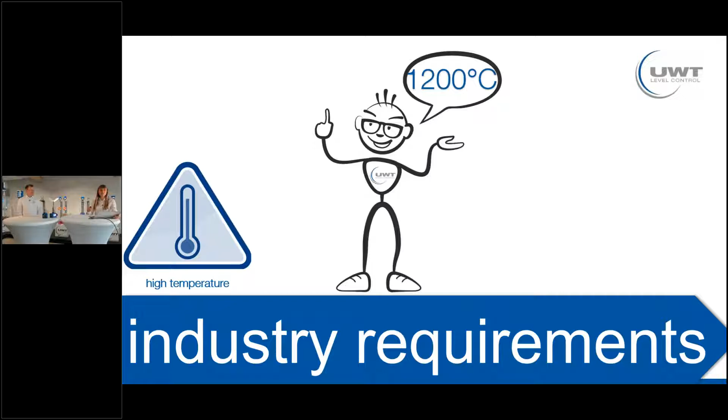We have specialized solutions for aggressive material. You can have our sensors made of special alloy steel with FFKM sealings, or for example we can coat your sensor completely with PTFE.

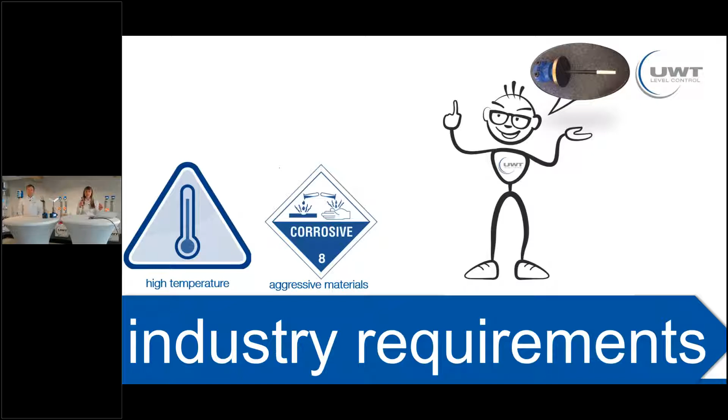The next point is the issue of mechanical load. Every sensor range includes a heavy-duty version. We can offer you sensors for mechanical loads up to 1200 Newton meters. Alternatively, you can use our NivoRadar.

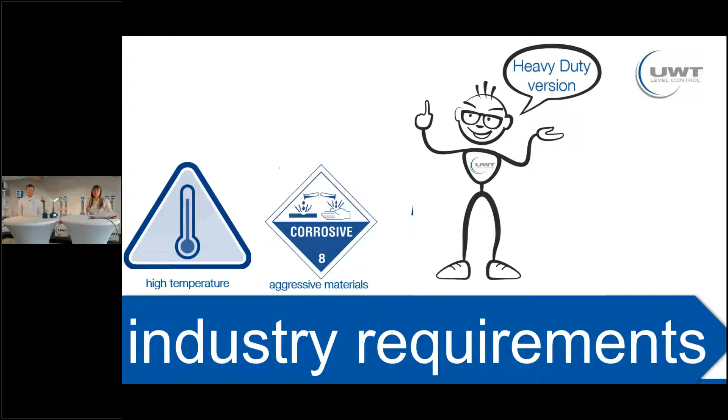A wide range of extremely dusty materials are used and found in the metallurgy process. To meet this challenge, your sensor comes equipped with a high degree of protection by way of the housing design, up to IP68, for example in the NivoBob. And on the processing side of the sensor, we also ensure full protection against dust.

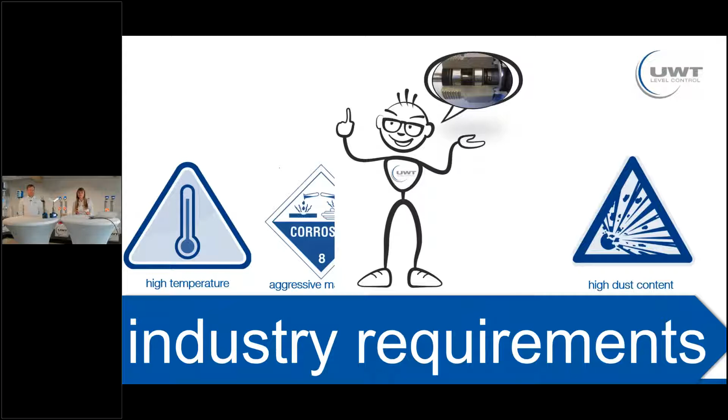Naturally, no one wants to be constantly replacing the sensor in a processing plant, so our sensors offer complete reliability and durability. In fact, one of our longest running devices, a RotoNivo, has been in constant use since 1982, which I think makes it older than many of the participants in our training session.

Yeah, it's even older than me. So, old guy.

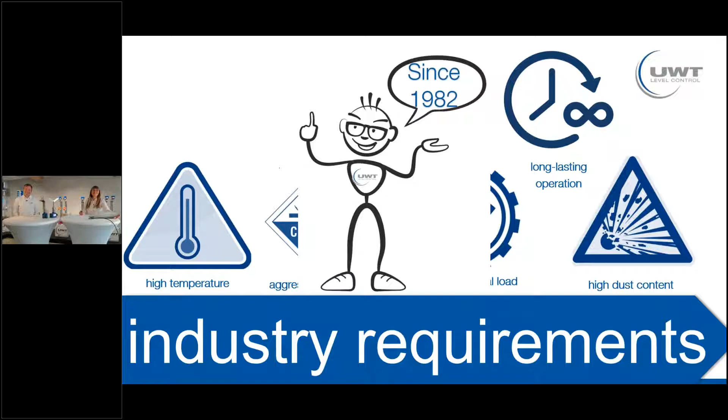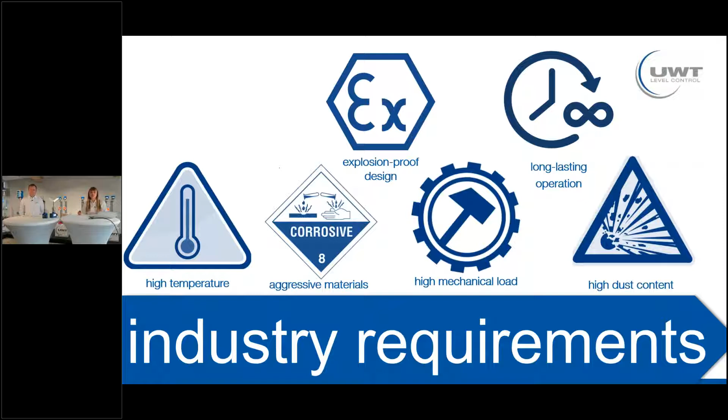Equipment in metallurgy plants must of course be explosion-proof. Our equipment is certified in countries all over the world. In addition to explosion protection, we can offer you sensors which meet the SIL requirements.

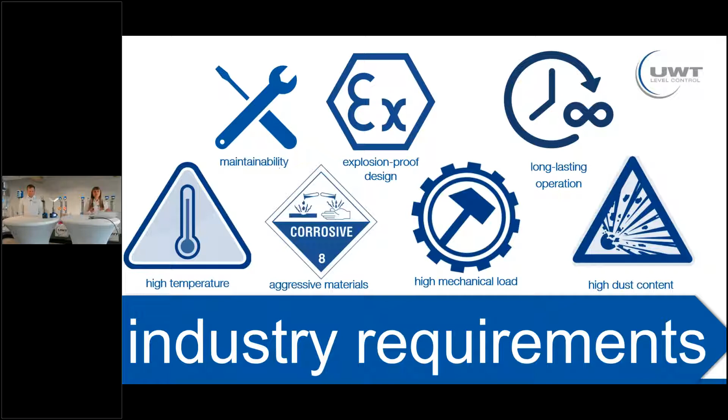And of course, in the unlikely event of something going wrong, we can support you by offering a wide range of spare parts for all our products, so you can simply and easily repair the device yourself. We support this with easy to understand self-help videos on our website that take you through all repairing processes step by step.

Thank you, Alexandra, for the industry requirements. So there are many challenges our sensors, our measurement devices are confronted with. But now let's move on to the process steps, raw material extraction, and then how steel is made, and also have a look at the success stories, what we already solved in the metal industry.

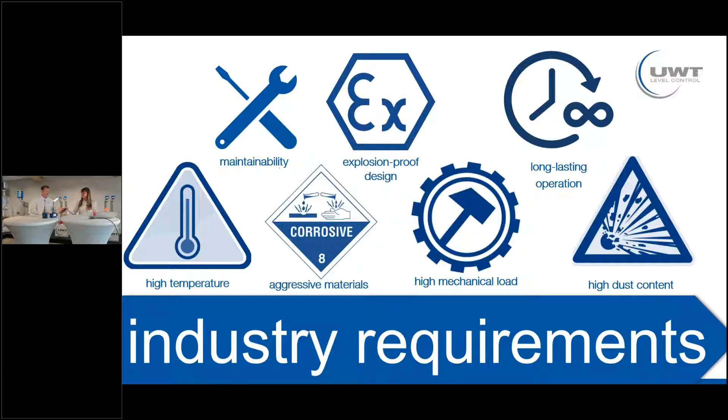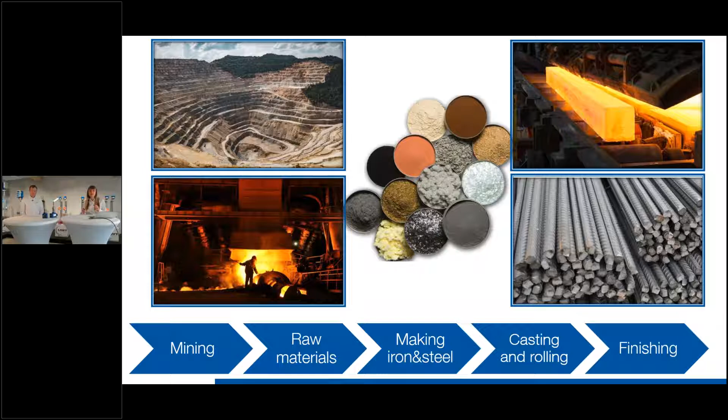From the rock to metal, there are the following steps: mining, raw material handling, casting and rolling, and finishing. Let's now look at our success stories for each step.

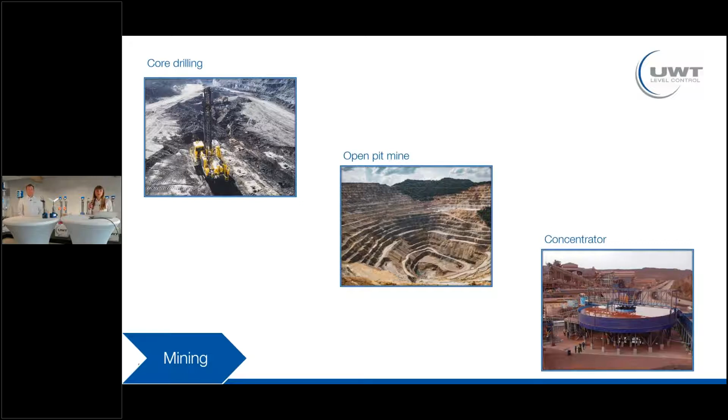To mine metallurgical coal, which will later be turned into coke, it's usually necessary to sink vertical mine shafts to access coal, which is deposited in layers or seams underground.

What complex tasks have we solved with our sensors? Let's see.

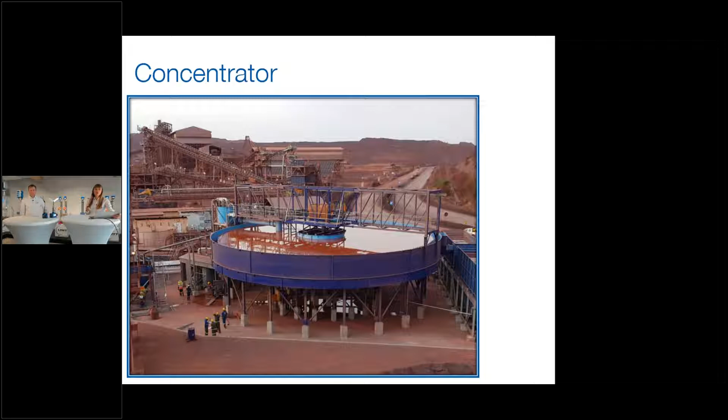Mining with stowing is an environmentally friendly way for coal mining. Stowing materials could be sorted as chemical reaction materials, solid refuses from coal mine, and natural material for stowing.

The customer had to know the level of stowing material in an exhausted mine. We had to use the available ventilation pipe for the measurements. The measurement range was only 30 meters, but it was completely underground at a depth of 100 meters.

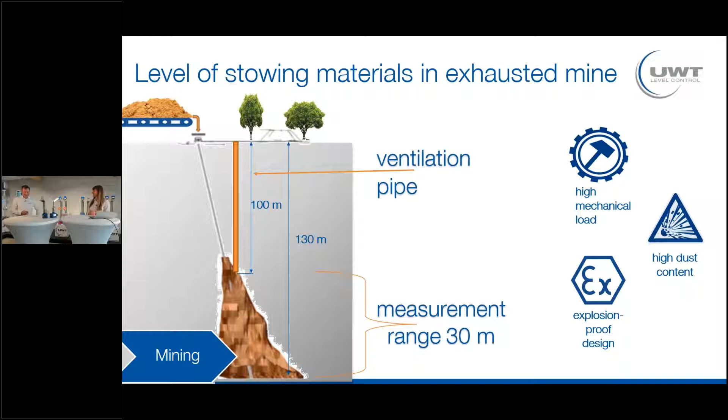How did we solve this problem, Nicholas? Yeah, thank you for the description, Alexandra. So this was a pretty interesting application you pointed out.

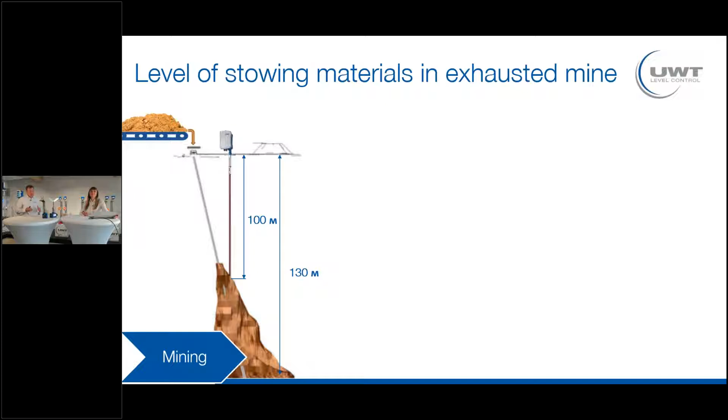So we had to design a special version of our NivoBob 3200. What did we do? We exchanged the standard sensor weight and put it on a longer rope.

The rope had a length of 100 meters, which was necessary to come through the ventilation pipe. With the long rope, we were able to come through the pipe and start the measurement at a depth of 100 meters underground, although the sensor was mounted over ground, as you can see on this slide. At a depth of 100 meters, the measurement range was 30 meters.

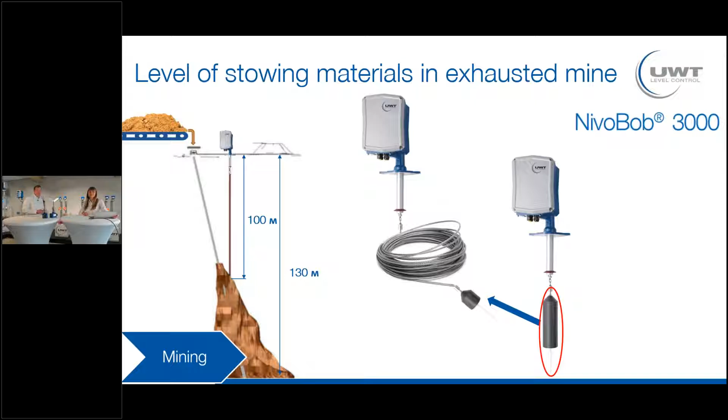This is no problem for our NivoBob 3200 with the S-tape version. Here you can see the mounting position on the right side of this ventilation pipe.

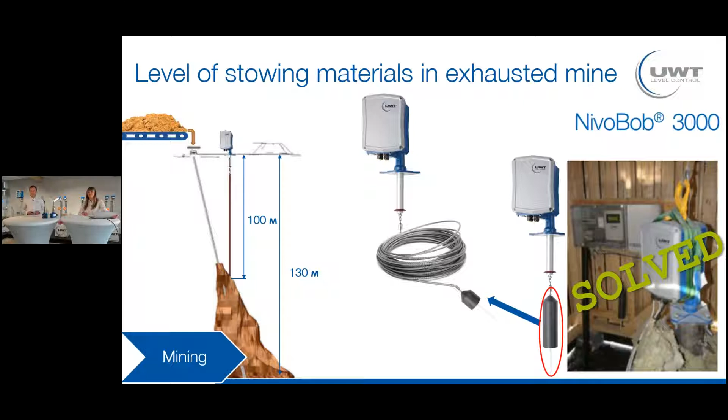Another important feature was the brushless motor for this application. As you know, we have two different motor versions: the standard motor and the brushless motor. The brushless motor has several advantages. The first one is measurement speed, so the sensor weight is driven up and down faster.

Second, and most important for this application, was the stronger motor. We had a greater tractive force, increased from 800 Newton to 3000 Newton. This is important, for example, when the sensor weight gets covered with material and the motor is then able to pull out the sensor weight from this coverage.

And as you know, when you're underground, you don't want to have a covered sensor weight. The lifetime of the brushless motor is way higher than the standard motor, so we have a lifetime of up to 60,000 hours. So we can guarantee that the NivoBob will work for a long time in this application.

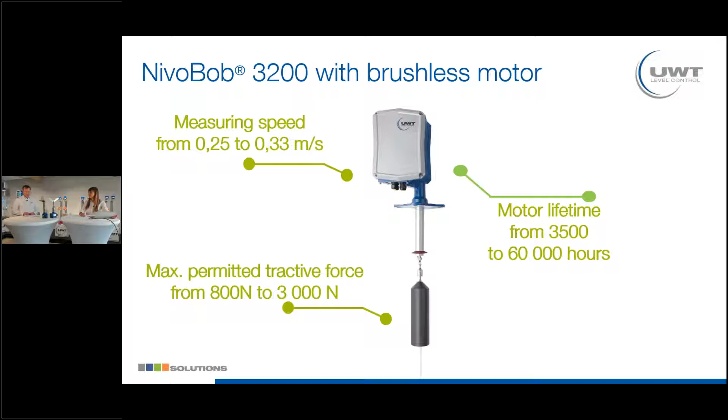A nice and interesting application, solved with a special solution of the NivoBob. We can offer a special solution every time.

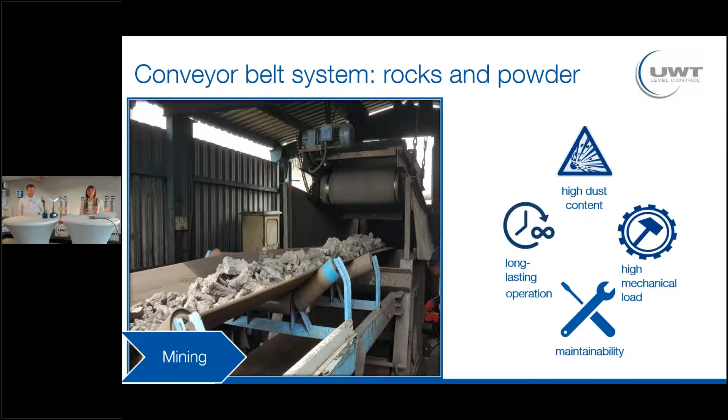The extracted minerals need to be transported for processing. For this transportation, a conveyor belt is used. One of our customers in Costa Rica needed to control a conveyor belt system responsible for transporting rocks and powder into a hopper. The abrasion and dusty environment were a tough challenge, together with the constant high flow speed of the material, which required a reliable response.

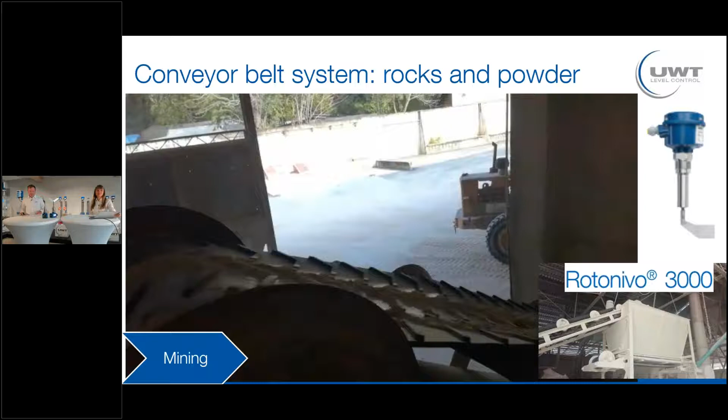Which sensor can be used for this application, Nicholas? You already see it in the video. So we use the Rotonivo 3000 for this application, and I have it here in my hands.

Here with the extension tube around the shaft, as additional protection for the shaft, so there are no damages due to this heavy material. We also have a special sealing design made out of PTFE, to avoid any dirt coming inside the extension or around the shaft.

Robust design, long lifetime in those applications. And for this application, one specialty, what you saw in the video, is that the sensor was mounted at the bottom, but it worked as a full detector.

As soon as the material reaches our sensor, our vane, it's blocked, and then you get a signal. This signal indicates that the cone of the filling material has reached a critical height, and this then stops the conveyor belt and the transportation of new material. So we can protect the conveyor belt from any damages due to too high a material cone.

So mounted on the bottom, but it worked as a full detector. Pretty interesting application here.

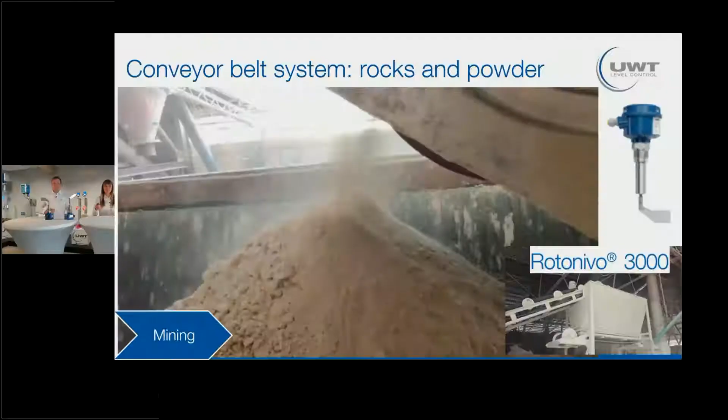Thank you. Let's go on later. Just a moment.

Again, the video you saw here: mounted on the bottom, but working as a full detector. Exactly.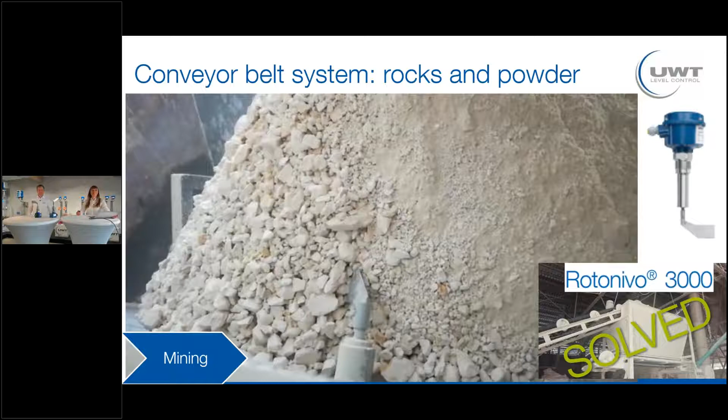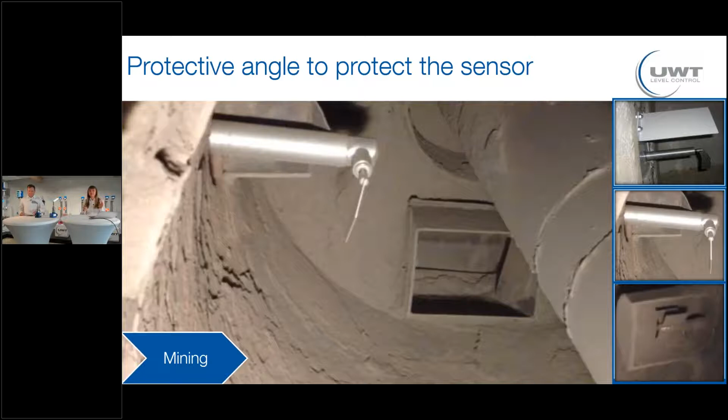Sometimes it is necessary to install the probe at such an angle so as to protect it from the filling material. Here you can see three examples of such protection, different between the sensors of our RotoNivo line.

Yes, we do offer different RotoNivos, as you can see on this slide. There's the standard version 3001, with just the shaft and no additional tube around it to protect it. Then we have the 3003 version, with increased stability due to the extension tube around the shaft.

And then we also have the tension version, what I have here in my hands. This is also a pretty heavy product, and you can see this tension version here. This is for greater stability for pretty heavy materials, to protect the shaft, and it's still working the rotary paddle rotation.

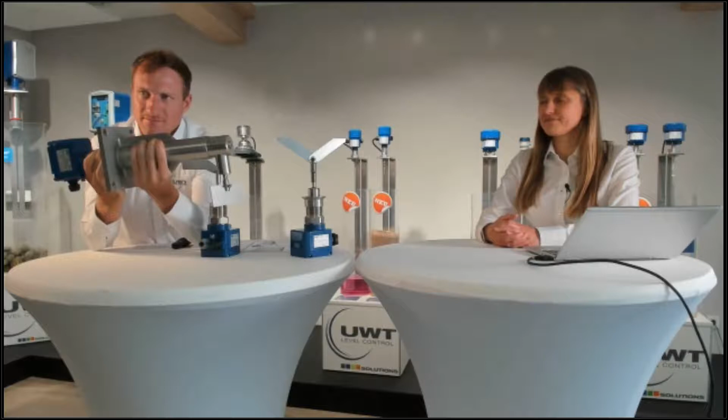And we have a stability of 1,200 Newton meters, so quite a lot of force that can work on the sensor. Also when you lift it, it's pretty heavy, and you can feel the robustness of our sensor here.

So when it comes to heavy materials, the RotoNivo can also be a solution, due to our wide variety, wide product portfolio, with many different versions here. Thank you.

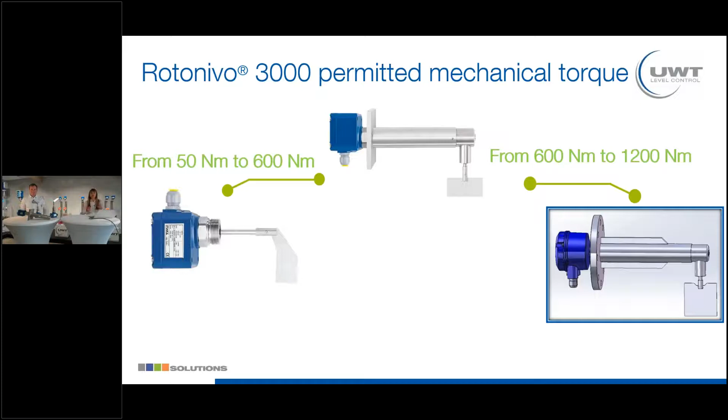Often it is not enough just to detect the filling, but it is necessary to know how much material is inside of the container. Here you can see our NivoBob and NivoGuide in high narrow silos containing raw material and iron ore.

This was, now you can see the slide what Alexandra already described. So we had a few problems here, but the 2-level transmitter you can use for silos with coal, limestone, or iron ore. One is the NivoBob.

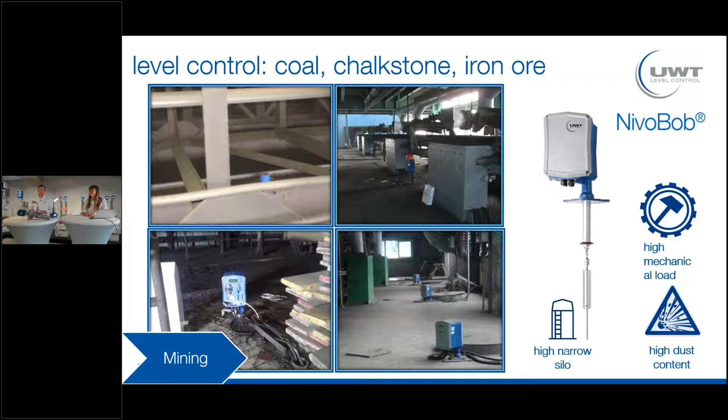Here we can focus on the high dust content. We have a great feature here, called the tape cleaner for our NivoBob 3200 tape version, to get rid of any dirt and dust.

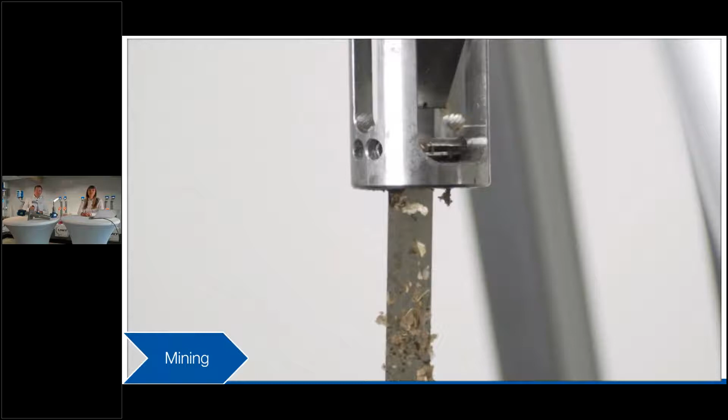So here you can see a short animation and then also a video of how the tape cleaner works and how it cleans the tape. You can see the dirty tape, and when the tape is carried in, all the dirt gets removed from the tape due to the tape cleaner.

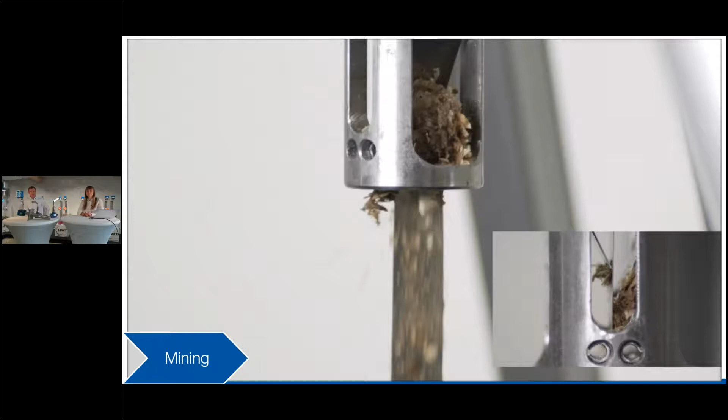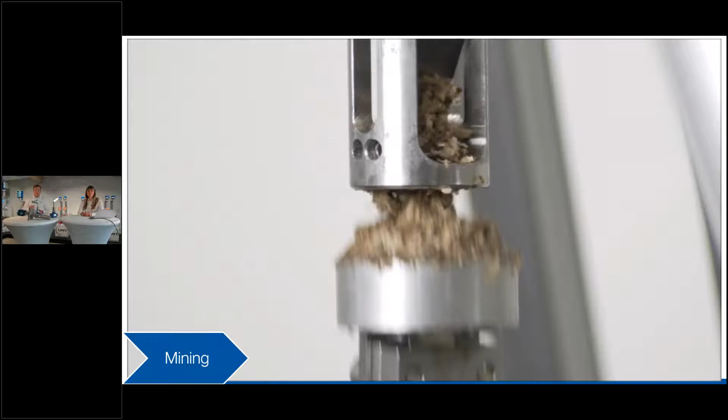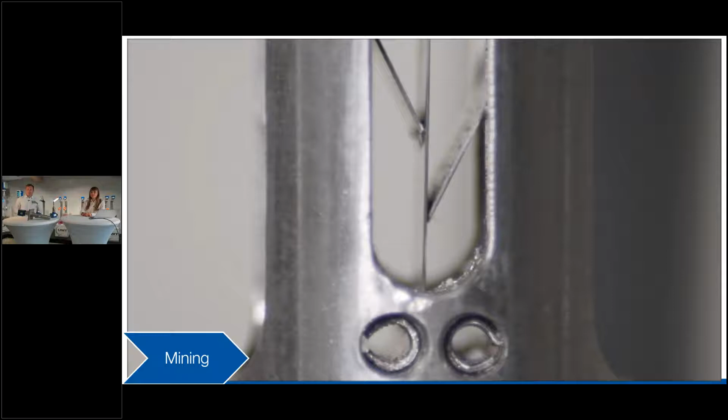It's also a nice feature that our tube cleaner drives in and out of the socket pipe, so you have a self-cleaning effect due to this in-and-out drive. The dirt gets thrown away and nothing is inside the mechanical chamber, so it always stays clean. Here again, the best solution for dusty environments with the tube cleaner.

And what we also have is the NivoGuide, a second technology. Guided wave radar technology can also be used in those silos for solid applications. I have it in my hands here. Again, a robust design of the coupling.

We have a large diameter of the rod or the rope. It's also available as a rope version up to a length of 75 meters, and this rope is also very stable, with a diameter of 6 millimeters. So, pretty robust design and a perfect sensor for those applications.

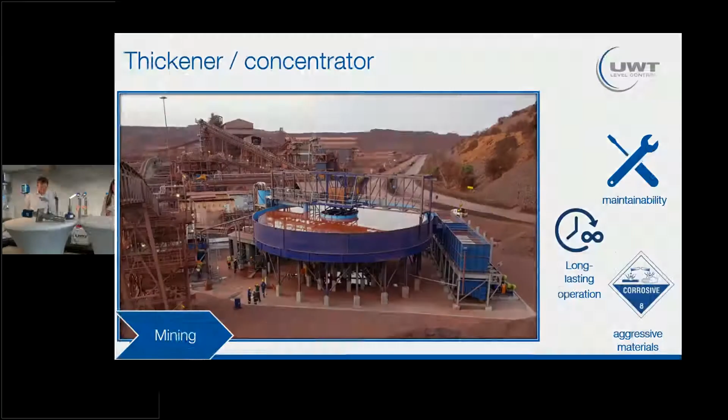Thank you. The next application is a thickener or concentrator. Here it is necessary to measure the interface of sludge in the water, with frequently changing parameters of the measured material.

The product is a slurry of water with tailings. It is like sand, 80 microns. This medium is very aggressive with a lot of different acids. How can we protect our sensors against aggressive materials, Nikos?

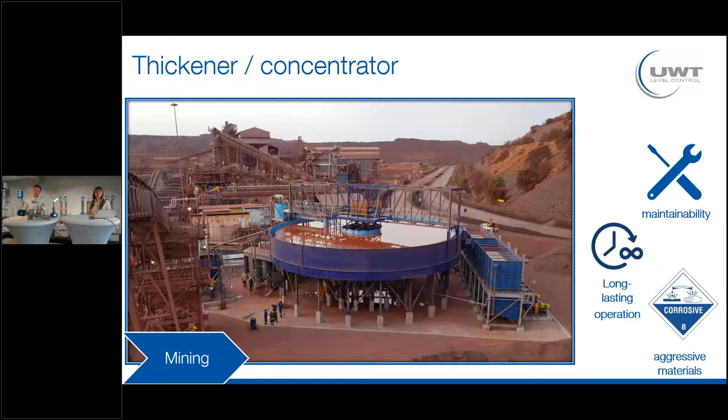Yeah, again, quite a challenging application. Here we had to design a special solution again for the NivoBob with coating. So what we did, we coated the sensor wire with Halar, and we also had to design a special sensor wire. Here on the picture in the middle, you can see the Halar coating for the aggressive material.

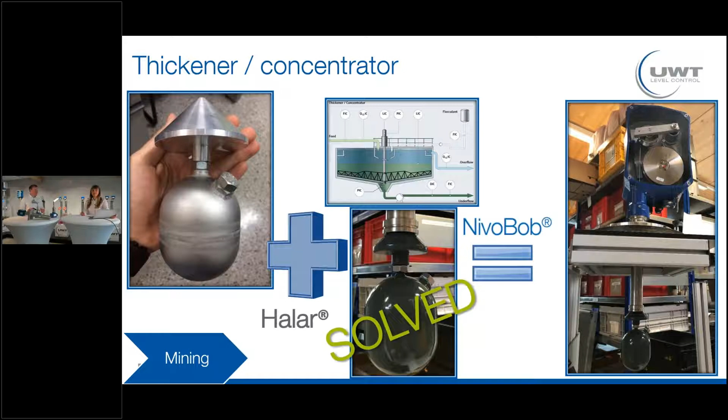So with this coating, it's quite resistant against this aggressive material. We also implemented a stainless steel tape roller to make it more robust and more resistant against the aggressive environment in this application. So here again, a special solution for a challenging application.

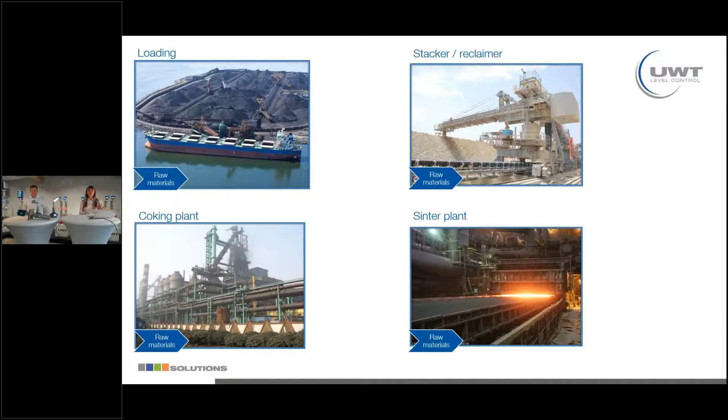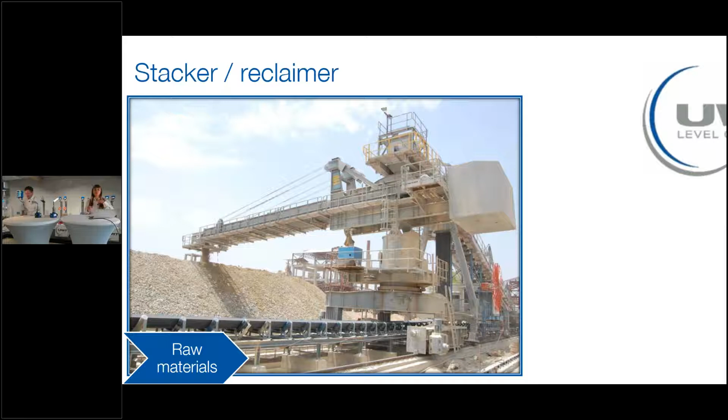The next step is raw materials. Once mined, the materials need to be transported. Iron ore, bearing material, and metallurgical coal is typically delivered to steelmaking sites by large ocean-going ships or using trains. Raw materials are stacked according to their grade by giant machines called stacker reclaimers. This machine picks up the raw materials and deposits them on conveyor belts using constantly rotating buckets.

To make steel in a blast furnace, coal must first be turned into coke. Coke has a dual role in the steelmaking process: first, it provides the heat needed to melt the ore, and second, when burned, it steals the oxygen from the iron ore, leaving only the pure iron behind. In the coking plant, coal is heated in the absence of oxygen to 1250 degrees. This removes any impurities in the coal, resulting in coke, which is a porous substance that is nearly pure carbon.

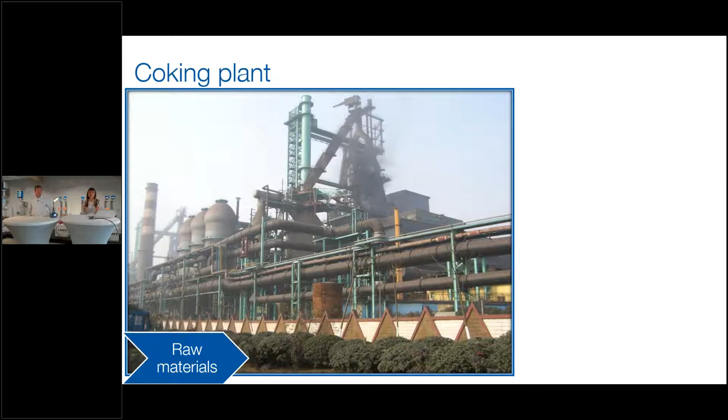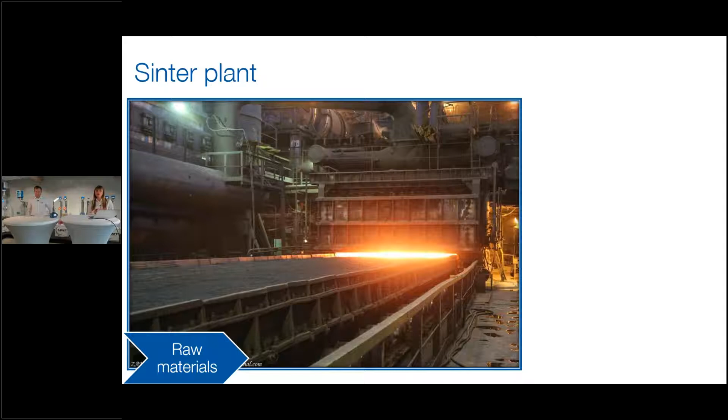What complex tasks have we solved with our sensors? Let's see. And how are the materials loaded onto the ocean-going ships? Here you can see an interesting application.

A shuttle conveyor belt travels all the way inside of a maritime container and fills the container with material. The point level sensor is to detect when the material reaches the max fill level and instructs the conveyor belt to back away until no level is detected, then continue filling, and so on until it reaches the end of the container.

We have limited space to install our sensor, and it has to be reliable and easy to maintain and be completely dust-proof. Which sensor is suitable for these applications, Nicholas?

Very interesting application and task for our sensor: to control or position a shuttle belt. What we used here was the RFnivo 3200, the heavy duty version, because of the heavy bulk material. Also our sensor, the RFnivo, is quite sensitive, so we have a high sensitivity. The sensor doesn't have to be covered fully with material to react; it's enough when the material comes near the sensor, then it already reacts. This was the main point why we could use the sensor for positioning the shuttle belt.

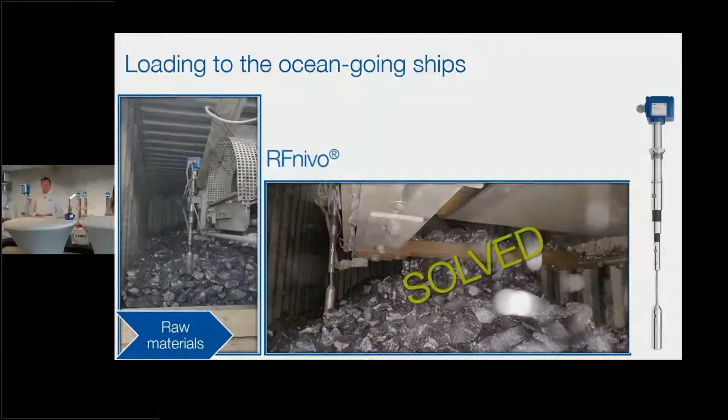Let's take a look at the stacker reclaimer. What sensor can be used for the slewing boom?

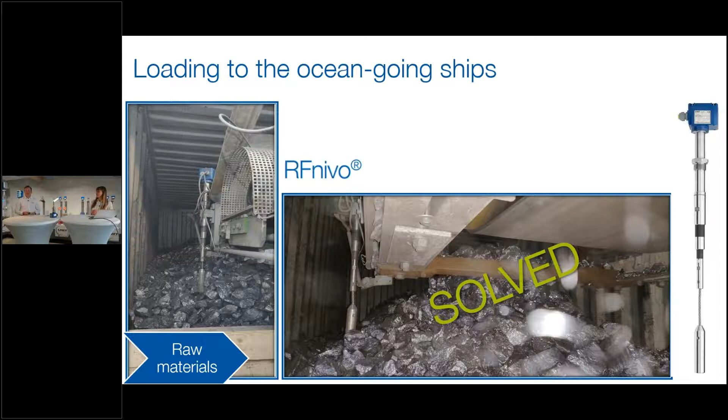For this application, it's more or less the same as I described before. Here we used the RFnivo 3100, the standard version, not the heavy duty version, with a rope extension as the solution. This is an open air application, so maybe it will rain, maybe it can snow, whatever, but there is no need to recalibrate our sensor. It's not influenced by any environmental changes, so that's why the sensor worked perfectly for the application.

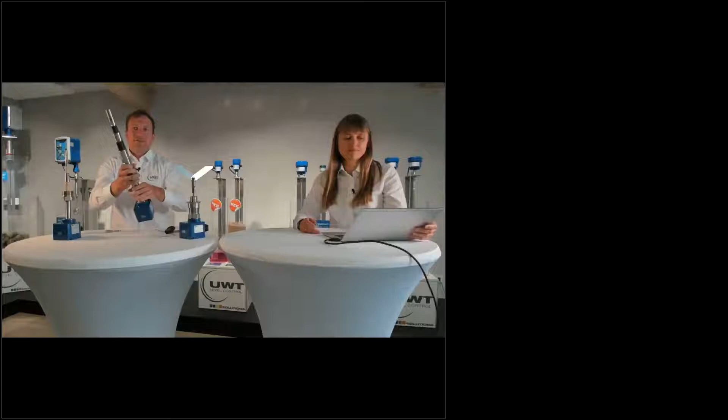I have those two sensors here. On my left hand, I have the heavy duty version, you can see the more robust design, it's a greater diameter. On my right hand, I have the standard version, a little bit smaller in diameter and not so robust. So this one is made for heavier products, and this one for the standard application. So again, one principle, but two different versions for different applications.

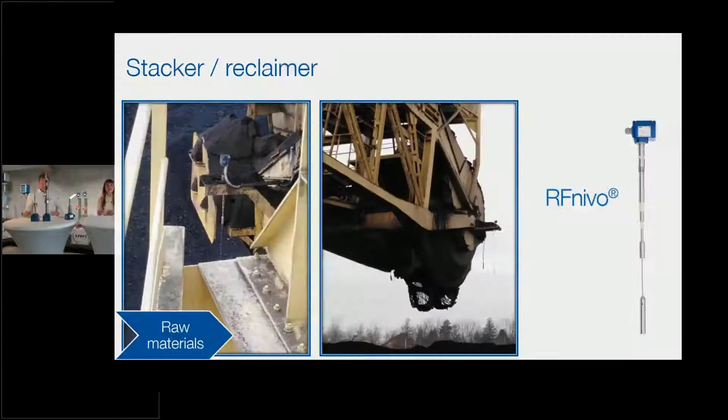Our presentation is a little bit slower than we want.

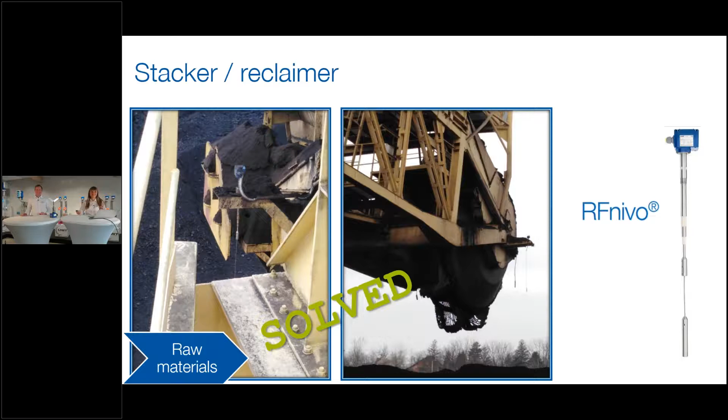I hope it will be faster now.

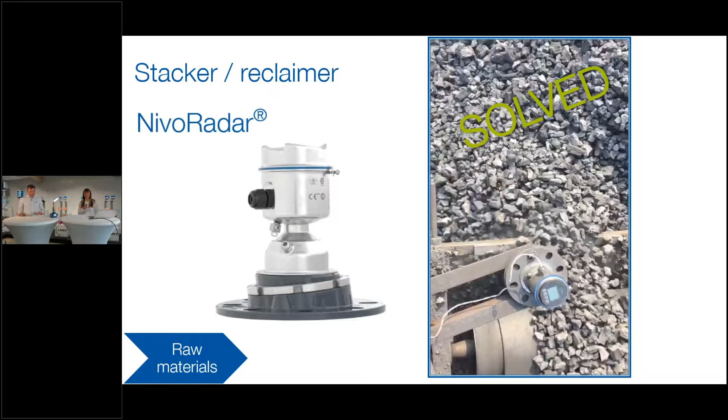Here we used our rotary paddle again, this time the Rotonivo 3004. This version is temperature resistant up to 600 degrees Celsius. It has a special sealing design to protect the shaft and avoid any dirt coming inside the shaft. We have this cooling element to keep the electronics cool, and also different extension lengths to be able to install them in long sockets, also from the side. So the Rotonivo 3004 high temperature version is one of the best solutions for electrofilters.

We installed many of them in the filters. They are working perfectly, and for a long time, even though we have sticky material buildup, the rotating paddle is not influenced by any buildup, it just keeps on rotating. So no problem if we have any buildup around our paddle.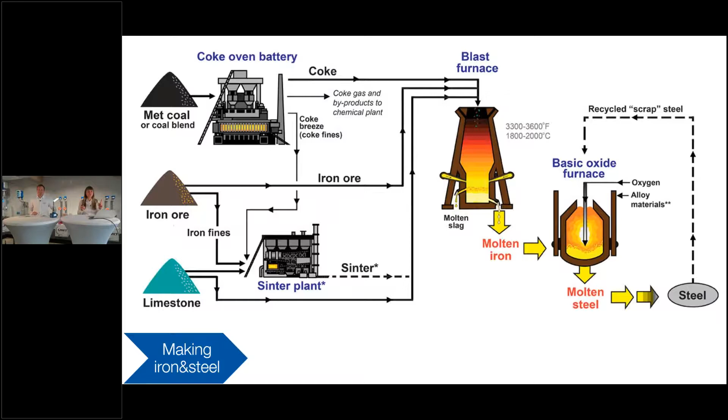A torpedo car is a type of railroad car used in steel mills to haul molten pig iron from the blast furnace to begin the process of primary steel making. These thermally isolated vessels are designed to endure extremely high temperatures, as well as keeping the metal in a molten state over extended periods of time.

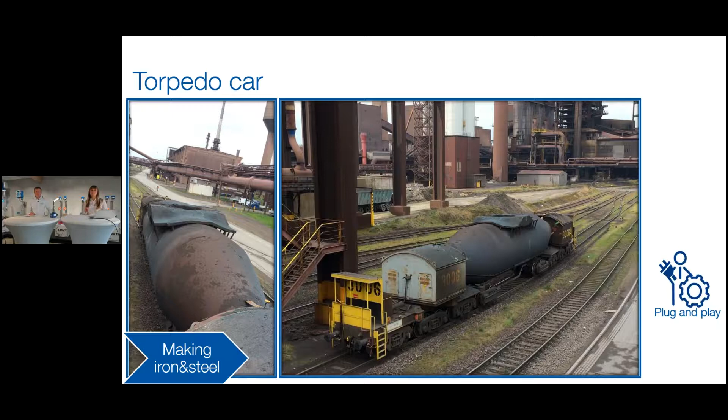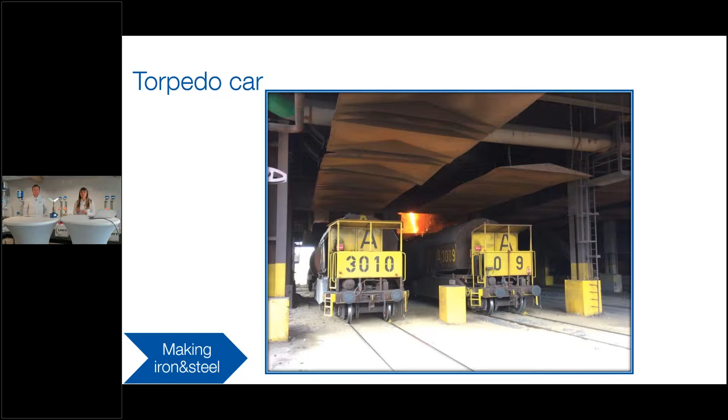How does it work, Nicholas? Yeah, you already mentioned the high temperature. So when you think of 1,500 degrees Celsius, pretty hot molten iron, pretty hot. And our Nivo radar is made for temperatures up to 200 degrees Celsius.

But what we had here, we had a protection sheet mounted over the torpedo car, and on this protection sheet we could then install our unit. So the heat was cooled through this air distance, and near our unit we had around 150 degrees Celsius, so no problem.

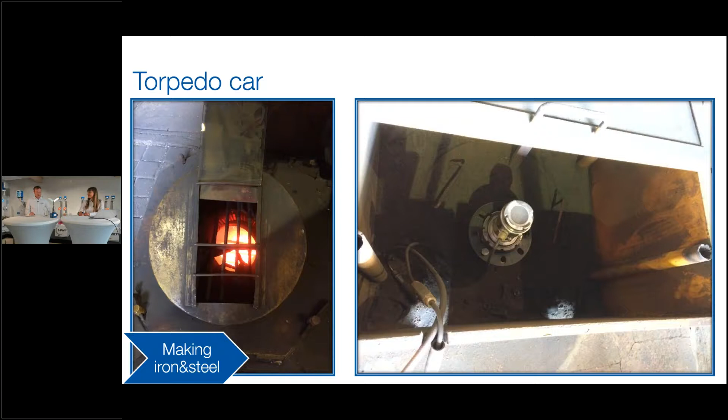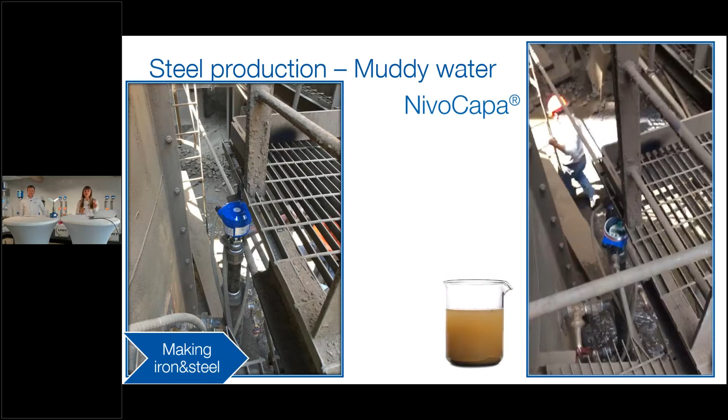And of course, at any metallurgical plant there are a huge amount of liquids. Let's have a look at only one example. The customer needed to measure the level of a muddy water tank. The installation should be done in a bypass chamber. The measured distance was 1,800 millimeters, and our sensor has to be installed in a tube with a diameter of 6 inches.

What can we offer there, Nicholas? Yeah, you already see it on the slide. We used the NivoCapa, and as you said, water is always present in a steel plant. High temperatures need to be cooled down, and for this we use water. And then we also have muddy water.

This application was perfectly made for the NivoCapa. We had a bypass tube, so this is a good installation position for the NivoCapa because it's perfectly made for narrow spaces, bypass tubes. It has a high accuracy, a fast reaction time, what you can see on the video, how fast the capacity changes. When we have a lower water level, the capacity goes down, then it raises, so fast reaction time.

And also we do have a PFA coating, so when it might be a little bit more sticky, the PFA coating avoids buildup around the rod. So accurate measurement results, and NivoCapa is a good solution here for the application when it comes to a bypass installation with muddy water. NivoCapa is working perfectly here.